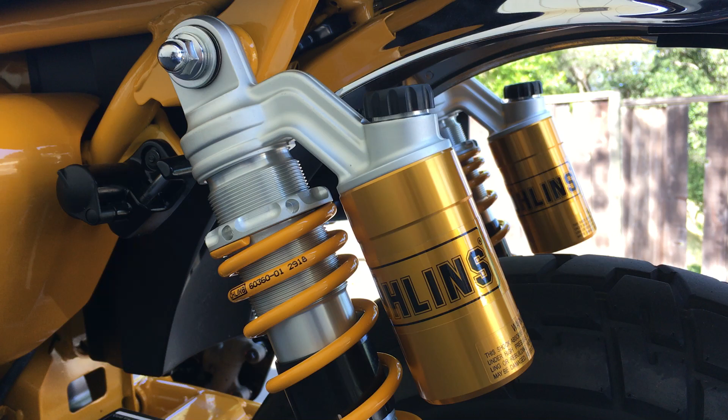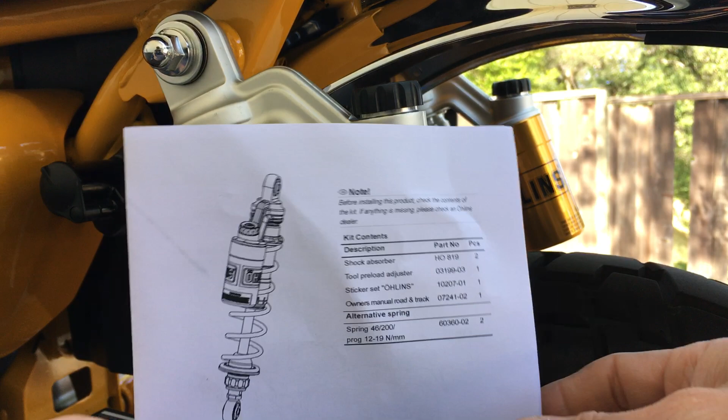Alright, so I'm going to talk about the adjustment for your shocks. So in here I have some Ohlins. So let's look at the manual here. So obviously the Ohlins is on my Monkey here. So that's what it is, HO 819, Honda Monkey. Alright, Honda Monkey right there. So let's look at the adjustments here real fast.

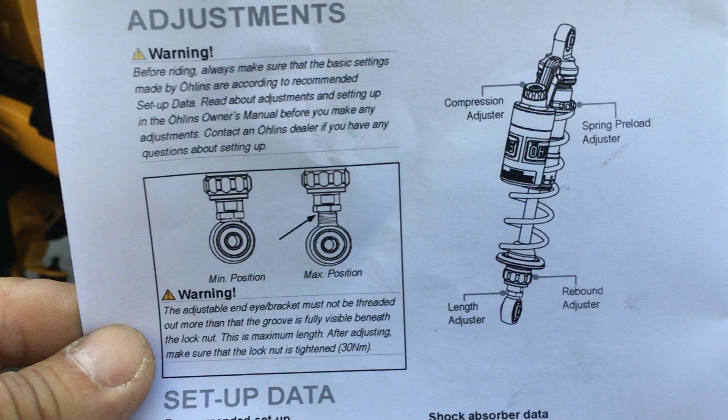So obviously the knob on the top of the shock there, so that's this knob up here, or on the reservoir I should say, so this knob right here, and that's the compression. Okay, so that's the compression knob right there, and the knob on the bottom here, this knob here, that's the rebound knob.

Then obviously this ring here, that's the preload, and the shocks come with this tool here, this little wrench. It looks like an Allen wrench, but it's round. See how it's round? So it's round all throughout. So basically you stick it into these little holes all along that ring, stick it in there, and that's how you turn it.

You turn your preload adjuster. And when you adjust the preload, make sure you take weight off the bike. When there's weight pushing down on this thing, it makes it harder. So take weight off of it. Right now my shock is brand new, so I don't have to worry about the dirt in the threads. So if you're riding around and it's really dirty and such, I suggest you clean up the threads.

And the best way to clean up the threads is with a toothbrush and some Simple Green. Spray some Simple Green up on here, let it soak for a few minutes, and then spray a little bit more. Use a toothbrush, brush as much as you can off the threads.

Then rinse it off with water and let it dry, and then it should be clean enough. And you don't want to oil the threads either, because when you oil the threads, that attracts dirt, so it makes it even worse. So don't do that. Okay. So let's look at the adjustment here.

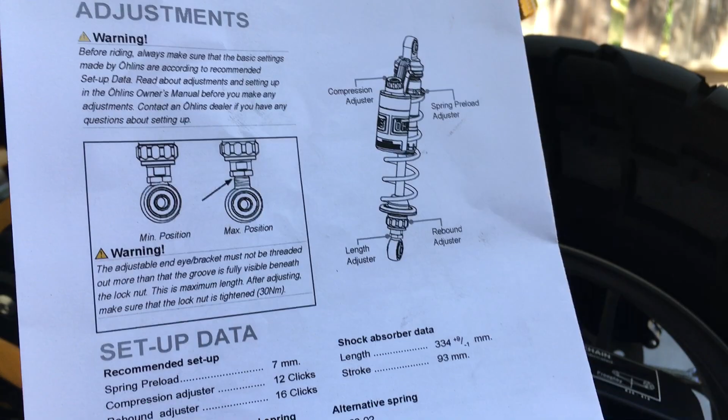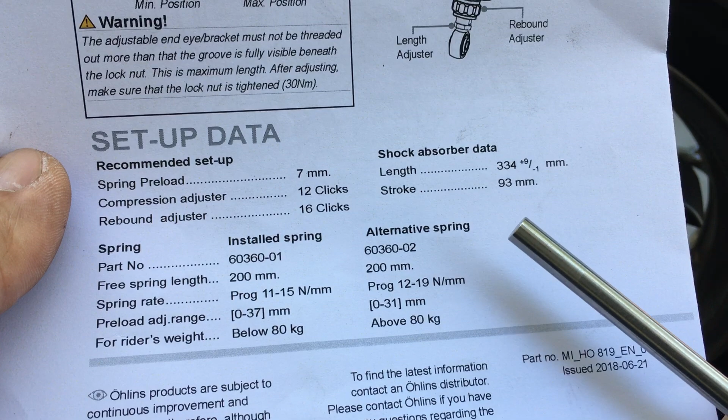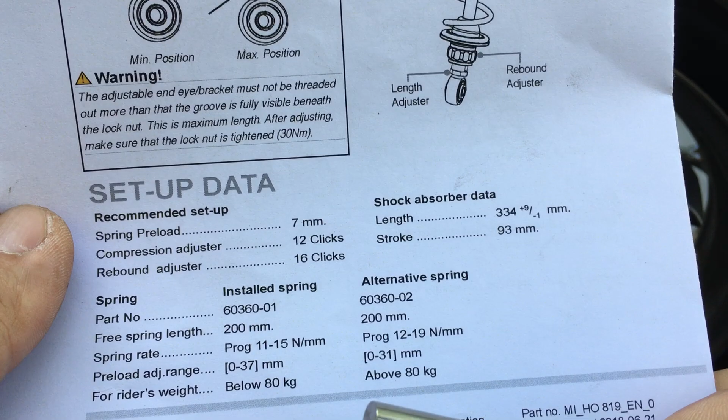So the cool thing about Ohlins is that usually when you get the shocks, they come basically preset for you. So here they tell you, for example, the length here, 334, basically 335 millimeters. That's the eye to eye. So this right here is the eyelet from the bottom to the top. So that's the length, right? So let's just call it 335. That's close enough.

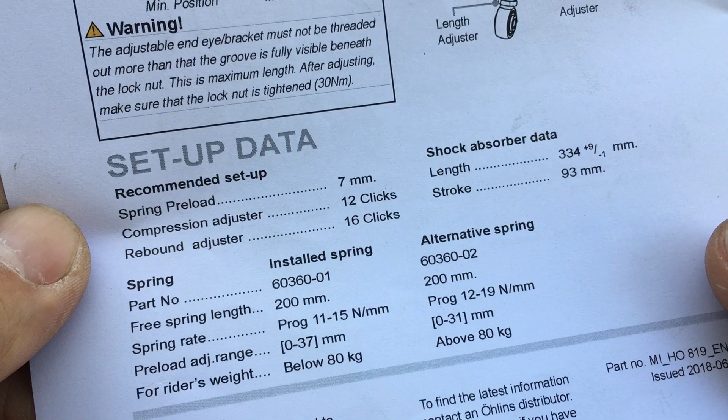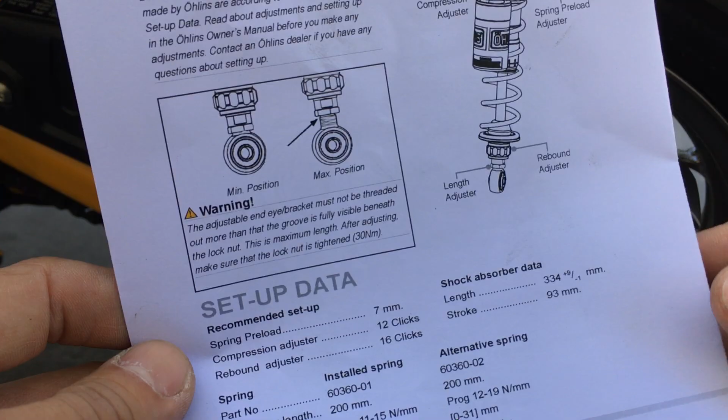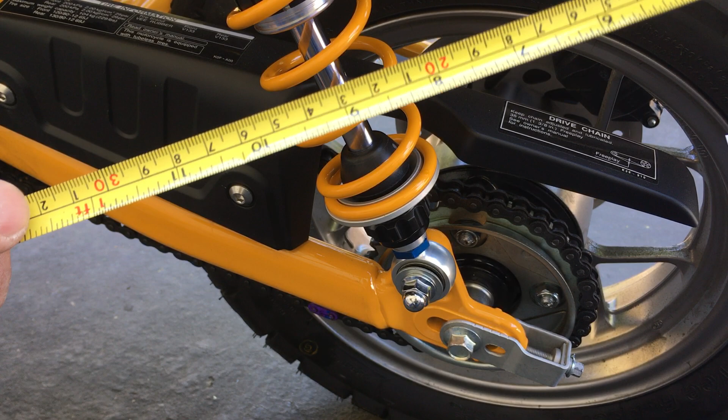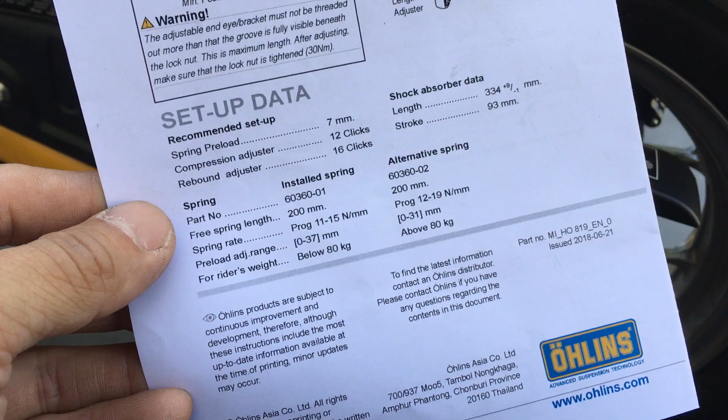And the stroke of the shock, so this stroke here is 93 millimeters. I think I measured about 92, but that's just eyeballing with my tape measure. Tape measure is not the most accurate thing, but my tape measure has millimeters on one side and inches on the other side. So I trust the Ohlins sheet a little bit more, but my reference will be off of my measuring tape.

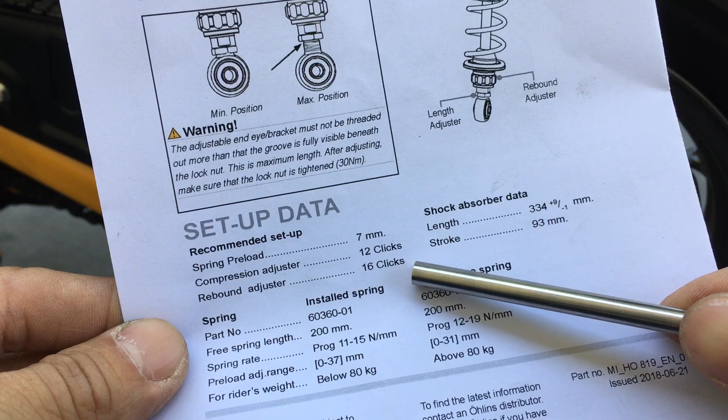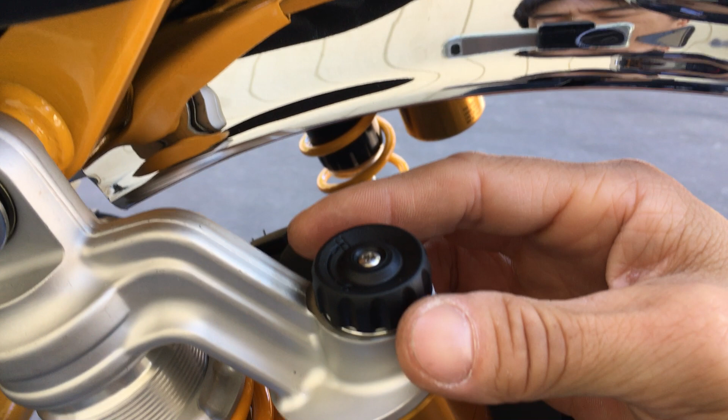Then the other thing is, compression adjuster 12 clicks and rebound adjuster 16 clicks. So whenever they talk about how many clicks, they're referring to how many clicks from closed. So for example, on the compression here, if you look closely, you see H for hard and S for soft. So when you go hard, or clockwise, you're closing up the valve, right? You close off the valve all the way. So you'll count from all the way closed.

So it's all the way closed now. I can't turn it anymore. I'm gonna turn it back, and the all the way closed is not even a click. I know it's not a click because from this click to this click here, I look at how much the knob spins, and from the last click to all the way closed, it doesn't spin as much. So from all the way closed, you go to that first click. So that's where you start.

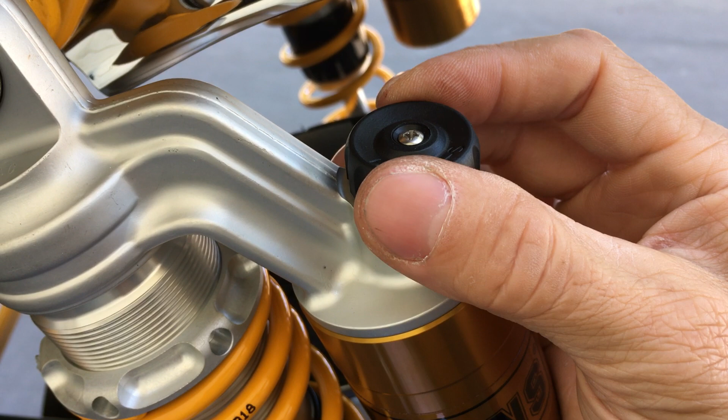Okay. So that's the first one. So you count from there, how many clicks basically. So that first indent right there, that's basically 0. And this setup says compression is 12 clicks. So I'm gonna go 1, 2, 3, 4, 5, 6, 7, 8, 9, 10, 11, 12. So normally when you get the Ohlins, it comes adjusted, but I'm just showing you as a reference where the starting point is.

Same with the bottom. The bottom is 16 clicks. So let's see. The bottom always confuses me on which way is actually closed. I believe turning it in that direction is closed, if I can remember right. Jeez, now I can't remember right.

Actually, let me just spin it and see how many clicks there are. This was 12 clicks. Let's see how many it could go all the way till it's fully open. 12, 13, 14, 15, 16, 17, 18, 19, 20, 21, 22. So 22 clicks. And if you need to adjust, always go back to 0, then adjust back out.

1, 2, 3, 4, 5, 6, 7, 8, 9, 10, 11, 12. Okay, that's 12. So this one should have been adjusted at 16 clicks. So I'm gonna spin it, looking from the camera's point of view. If I was looking down from the top, I'm gonna spin it counterclockwise. Let's see how many clicks it has.

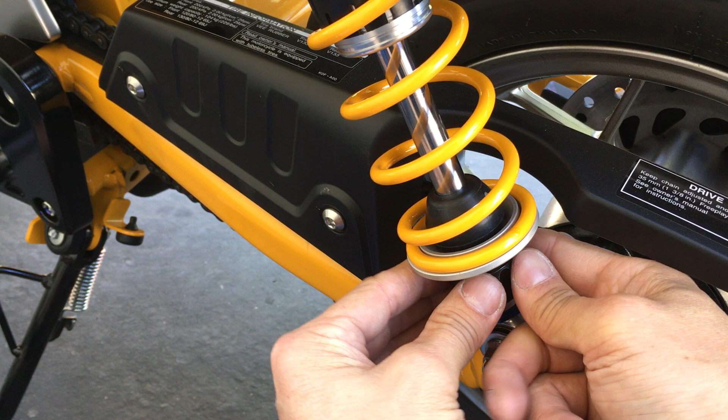Oh, no more clicks. Okay, so that's actually opening it up. Oh, I can see the O-rings right here. So that's actually opening it even more. I can actually see the O-ring right there. So I think that's actually opening this thing down this way, basically unscrewing this, which I believe is softer. I swear the bottom knob always confuses me.

So that's all the way. I can't turn it anymore. Looking down this way, I'm turning it counterclockwise. I can't turn it anymore, so I'm gonna go to the first click. So the first click, which is all the way, is also a click. Let's see the movement. Yeah, that's the same amount of movement. So all the way closed is basically the first click, or I should say 0. Let's call that 0.

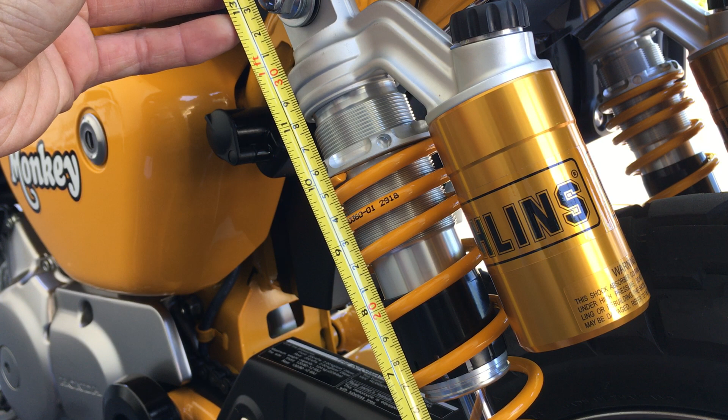Okay, so that's adjusting the valving. Preload-wise, adjusting preload: the measurement that Ohlins gave is basically 334 or 335. Here I have it measured out at 334, on my little thing here. And Ohlins says the stroke here is 93, but I measured out, I think, 92. So that's your relation right there.

So later on, you measure your eye to eye, from the top eye to the bottom eye, when you sit on it fully geared up, whatever you wear while you're riding, with your helmet on and everything. This is best with a buddy. Have your buddy measure the eye to eye once you sit on it, get it upright, and get your feet off as best you can, as if you were riding the bike.

It might be even better with 3 people. You sit on it completely how you would be riding the bike, the second person holds the bike upright, then the third person measures the eye to eye, top to bottom.

So you look at that in relation to what the original fully extended eye to eye is, and you look at the difference there. So let's say the stock Ohlins was, what was it? It was 334. I measured 334, and if I sit on it when I'm fully geared up, it's gonna go down to, let's say, 300. So 334 to 300. That's basically 34 millimeters that it has squatted down.

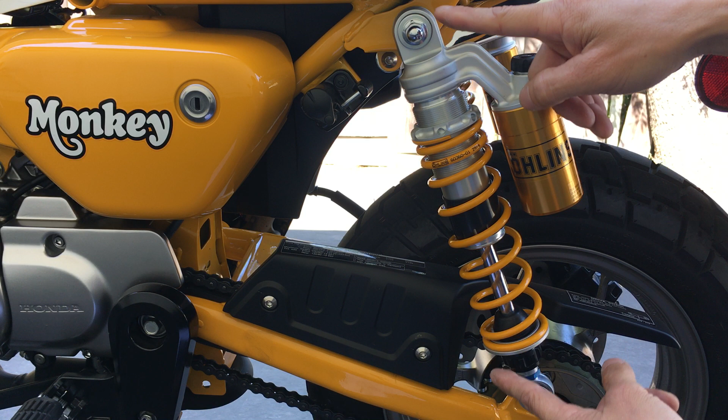So if you look at this length here, this was what I measured. What was it? 92. Ohlins says 93, but I measured 92. So since I'm using my scale here as a reference point, you stick to one thing. Don't switch around. Otherwise, you lose consistency. So I'm using this right here. So my thing says 92 here.

So if you lose 34 out of 92, what is the percentage? 34 out of 92, right? So you look at the percentage, what your target is as far as how much sag you would have. And to adjust the preload here, the target is about 30%. So basically, if I measure 92 here, 30% of 92 is how much?

It's not quite 30, because if this was 100 millimeters, 30 millimeters would be 30% obviously, but this is 92 millimeters, so 30% would obviously be less than 30 millimeters. So my initial setting, whatever it was, let's say it sagged down from 334 to 300. That means it moved 34 millimeters. So that's 34 millimeters out of 92.

That's more than 30%. So that means my sag is too soft, and I would have to tighten this down a little bit. Basically, put more preload on here, so that way it doesn't sag as much when you sit on it. So that's how you figure it out. So I usually target about 30%. I wouldn't go more than 30%, unless you have some really long travel dirt bike. You might be able to get away with a little bit more than 30%, but usually 30% is good.